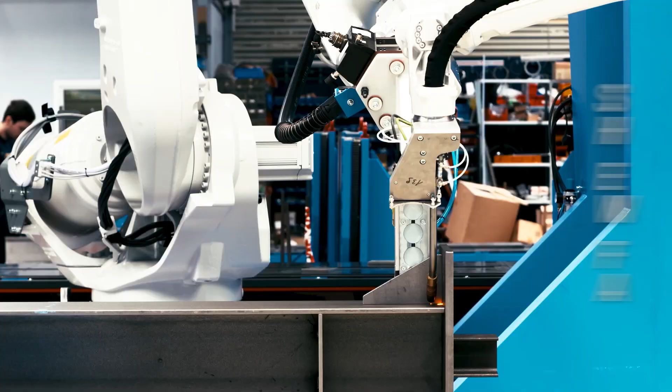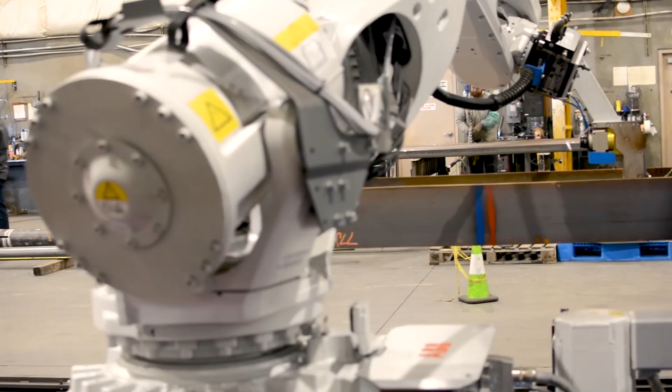The single rail assembler, powered by Zebau, is the absolute solution for steel beam assembly. This fabrication shop supercharger has been designed specifically to speed up one of the most time-consuming areas of the fabrication process.

The design of the assembler begins with an ABB tacking and welding robot, paired with a handling and parts scanning robot, forging an unbeatable combination. Assemble beams, tubes, and channels all on one machine.

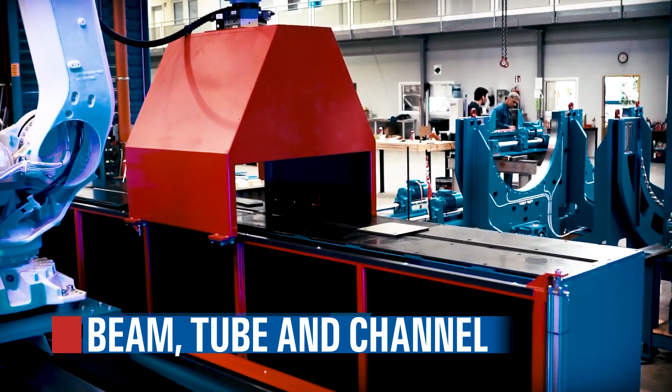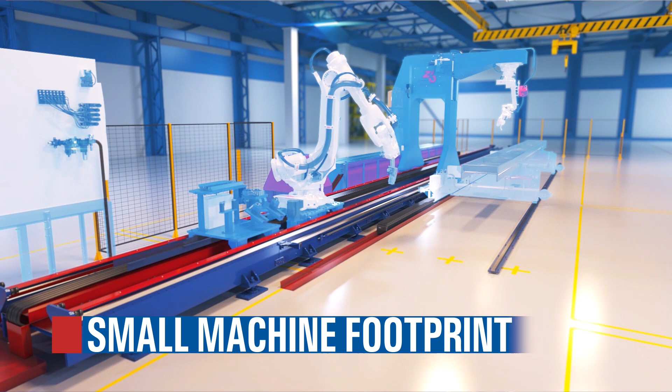The whole robotic system rests on a single rail design, which maintains a small machine footprint. The compact design only occupies the space of one fitter station. Plug this robotic steel beam assembler into a fabrication shop and it's ready to roll.

Most important is the design for operator safety. The hazards of fitters and welders continuously rotating material is eliminated. Load and unload with a fork truck while safely monitoring processes from a distance.

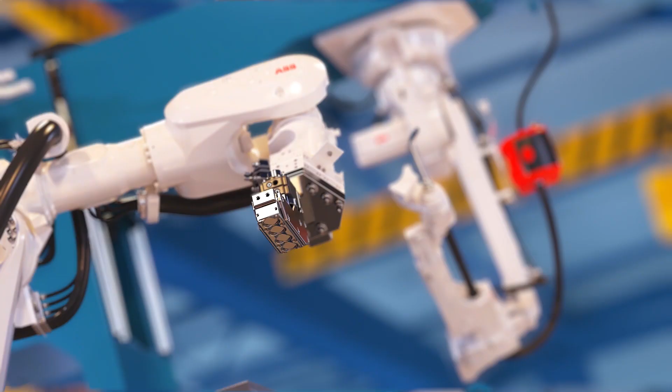Far above the design of the assembler lies its incredible functionality. This machine was made to process large amounts of steel accurately and efficiently.

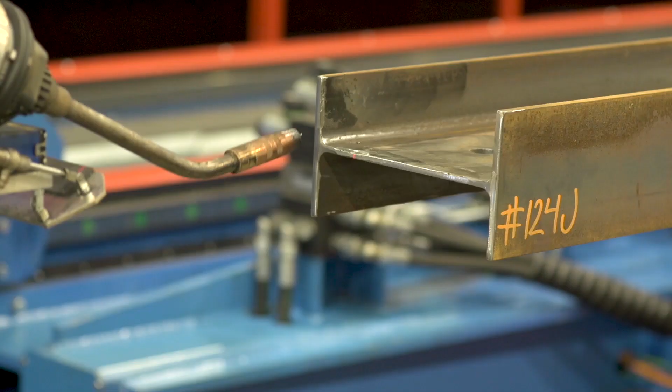The torch-mounted laser measurement allows the tacking and welding robot to identify the profile's dimensions, as well as the dimensions of existing tacked parts for perfect positioning.

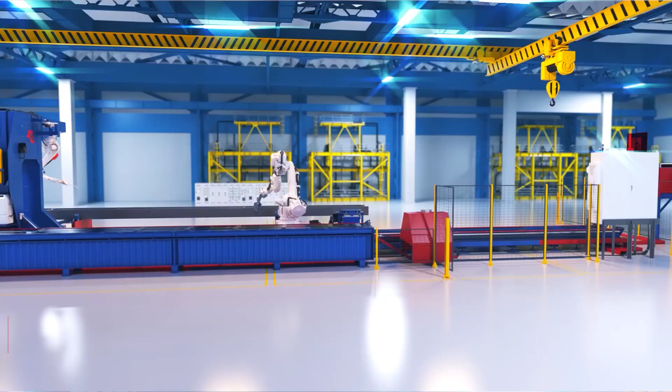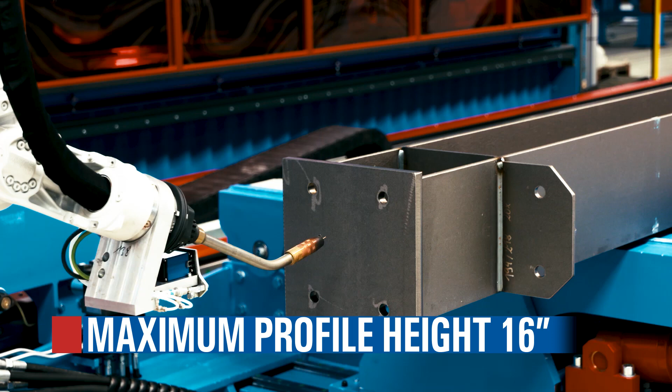The crux of the assembler is robotic welding for structural steel. This machine has the ability to place parts up to 440 pounds onto a profile as big as 30 inches wide, 16 inches tall, and up to 60 feet long.

Tack and weld with single or multi-pass options up to 0.66 inch.

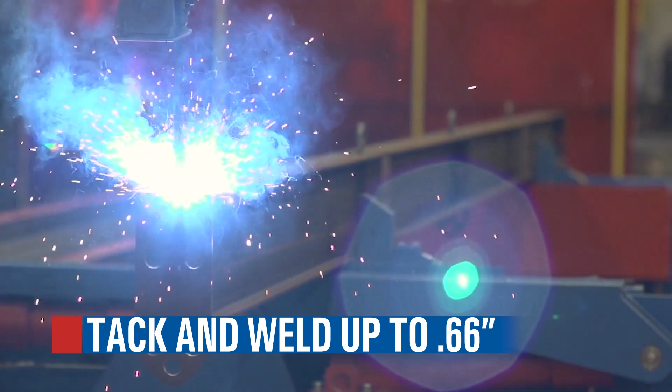The assembler's parts handling robot assists with scanning parts placed on the table, then switching over to the magnetic attachment. The parts handling robot is able to fit parts on all four sides of the profile with unimaginable accuracy.

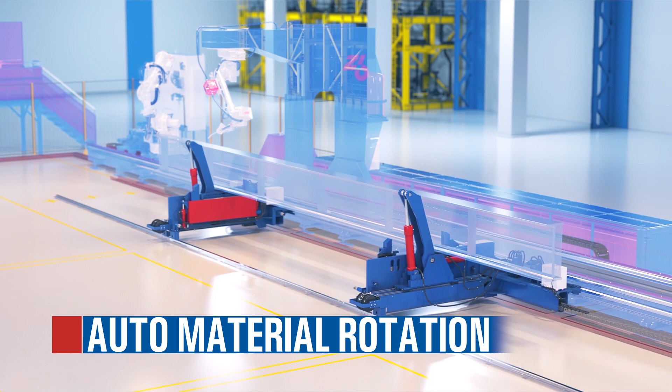In order to tack on the opposite side, the Zeeman assembler automatically rotates the material, operating up to a maximum profile weight of 11,000 pounds. Material is rotated with ease and results in an overall increased project speed.

Seamless shop fabrication.

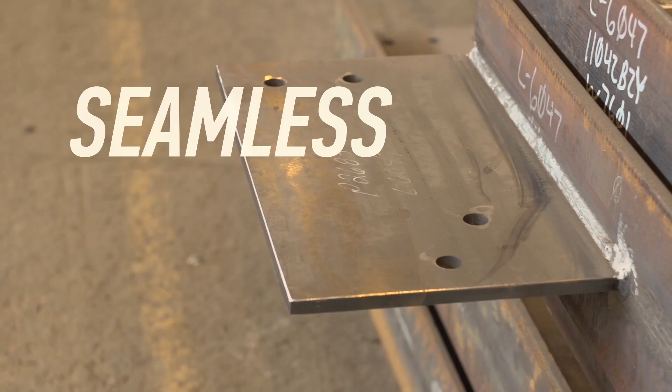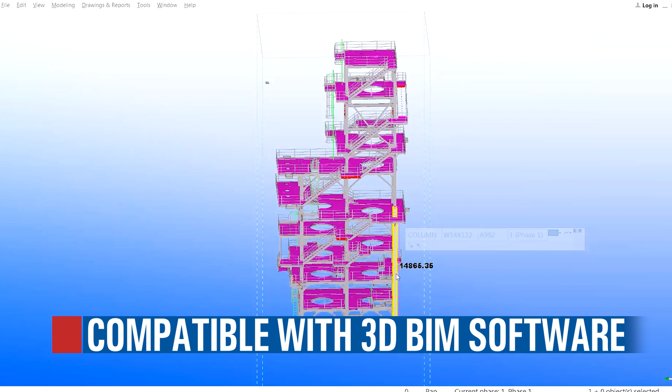The control on the assembler is outfitted with Zeeman's ProFit software. This intuitive software makes robotic beam assembly simple and streamlined. Compatible with all common 3D BIM software, ProFit assists the operator throughout the entire process. From importing to creating to editing, produce a completely finished product every time.

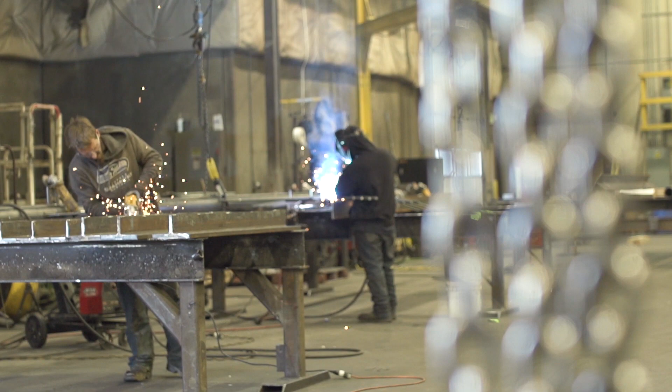The assembler gives us the opportunity to fit beams, put them in a stack and pile, and give them to the welders. And while they're welding with 3 or 4 or 5 welders, we're able to continue to pre-assemble beams that are right on the number. And the welders love that. They're not chasing soapstone lines and they're not flipping beams.

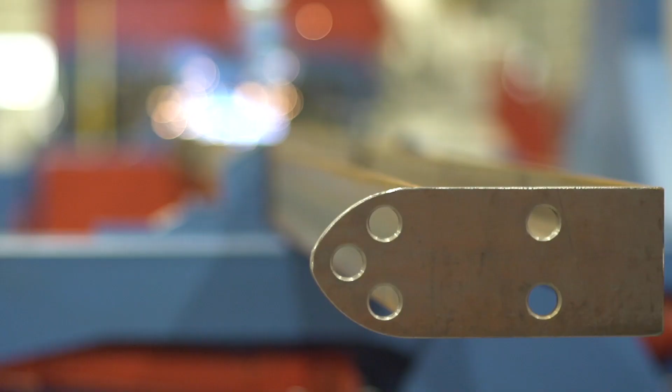The most impressive aspect of the machine is the quality of the weld and the speed of the assembly. It can take a heavy plate and grab it really fast with the handling arm and put it accurately where it goes. And it's right on the money.

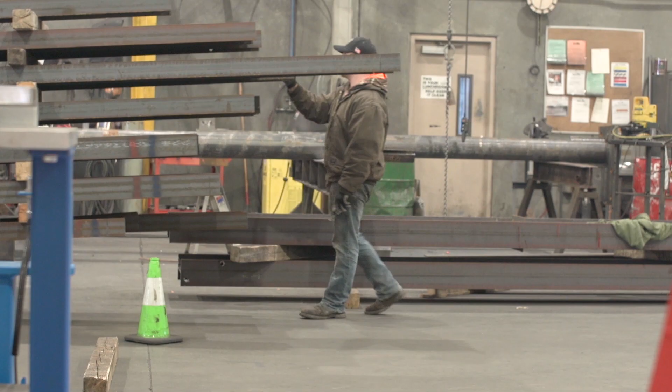We had a big job for that thing. The first thing it did, it was fitting columns. I wanted to say they were 14 257s, but they were big, huge columns, heavy, and the building had cold form girts. So it had a clip inside those flanges, like every 6 inches.

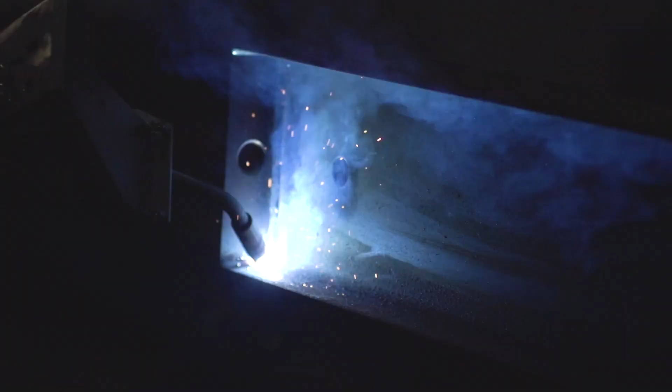And so that thing would just go in so smooth and get in there and weld those. Everyone just perfect. You know, you look down there and you go, holy smokes.

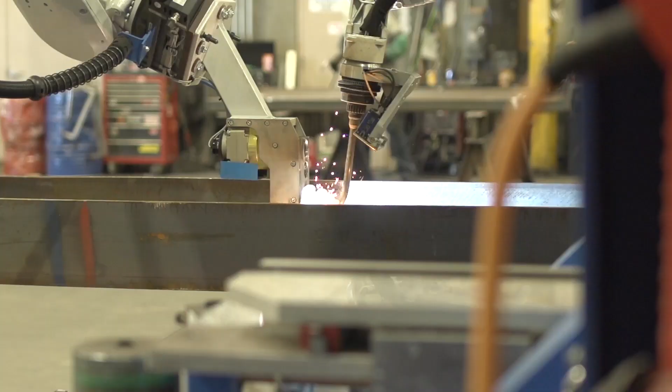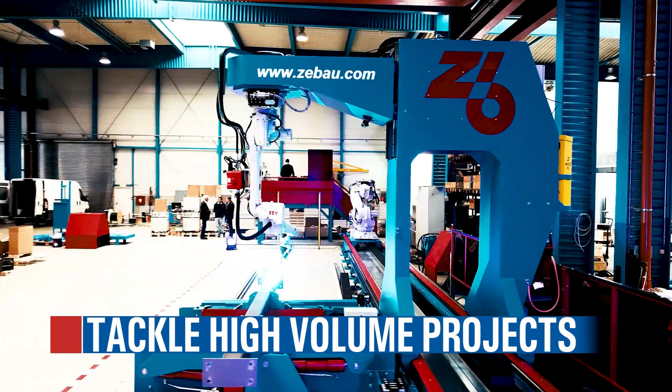This assembler was designed to free up crane usage, help speed upstream CNC processes, and tackle high-volume beam, column, and tube projects. Robotic welding for steel beam assembly benefits the entire fabrication.

The assembler, on average, processes at a speed of 1.5 minutes per part, with an accuracy of 1/24th inch over a 60-foot profile. That momentum, paired with a simple loading and unloading process, will leave fitters and welders free to handle the more complex projects.

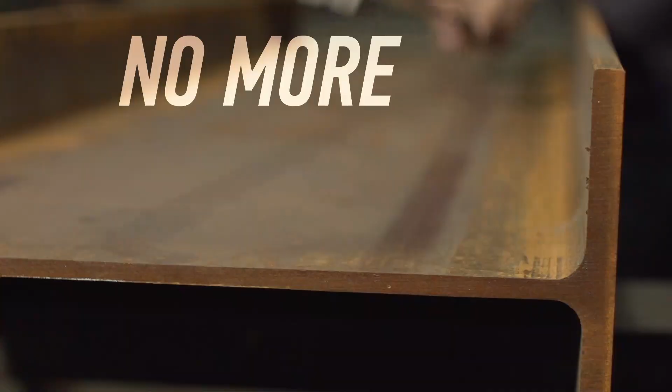No more pulling tape. No more drawing chalk lines. Load the material and hit go.